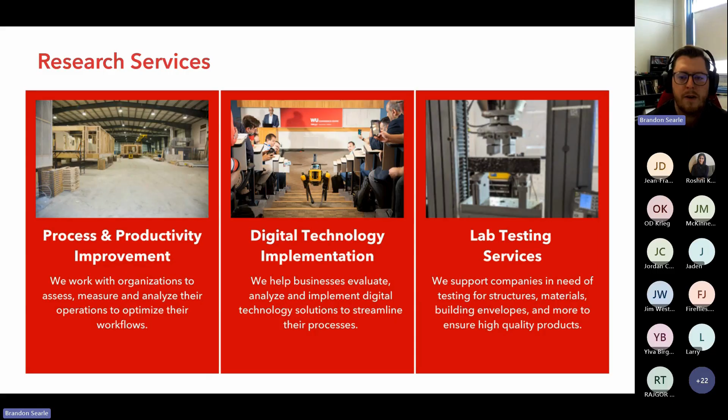Just diving into our research areas. So again, I mentioned process and productivity improvement. It's kind of a high-level list of what happens there, and it's led by Dr. Zhen Lei. Digital tech implementation, again, that's kind of led between Dr. Zhen Lei and Dr. Jeff Rankin. Our structures and building enclosure testing, led by Dr. Alan Lloyd. And our benchmarking and innovation in construction work. And many of you may have seen some of the projects we're doing as it relates to roadmaps for offsite construction in Canada and in different jurisdictions.

So quickly, just about Building Transformations. So they've partnered with us to deliver this webinar series. Building Transformations fosters industry innovation by providing programs which help our members push the industry forward. Their purpose is to advance civilization by driving the building industry to be global leaders in innovation and technology. They have over 2,000 members, nearly 10,000 in their mailing list. And there's, as you can see here, a nice mix of industry, government, academic institutions.

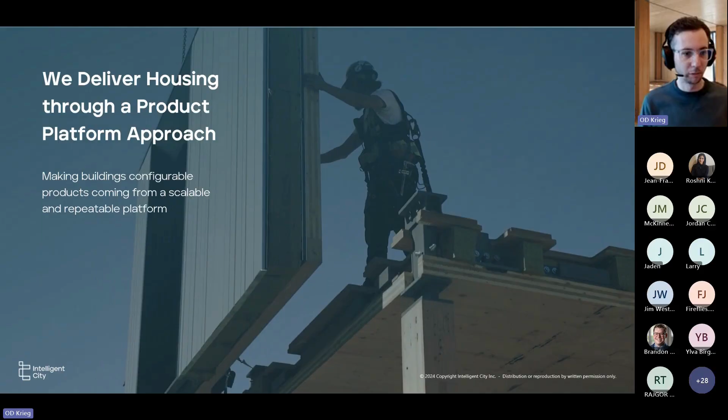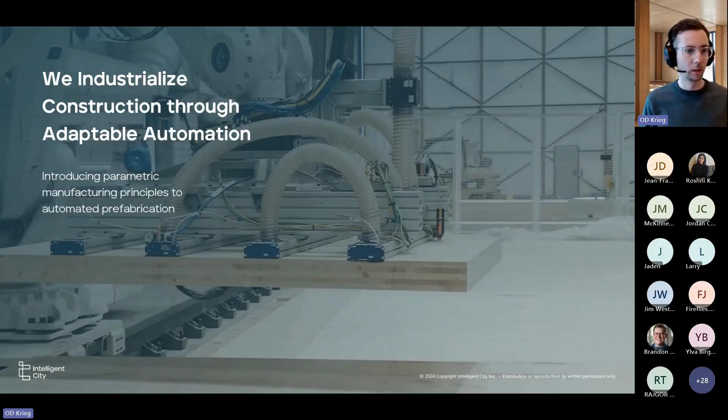The original idea was relatively simple. We want to deliver housing through a product platform approach. We want to develop a configurable kit of parts, a configurable product, if you want, from a scalable and repeatable platform. And we want to industrialize construction along with that, because in order to deliver configurable kits of parts, we need a certain flexibility in manufacturing automation in order to customize building components like that.

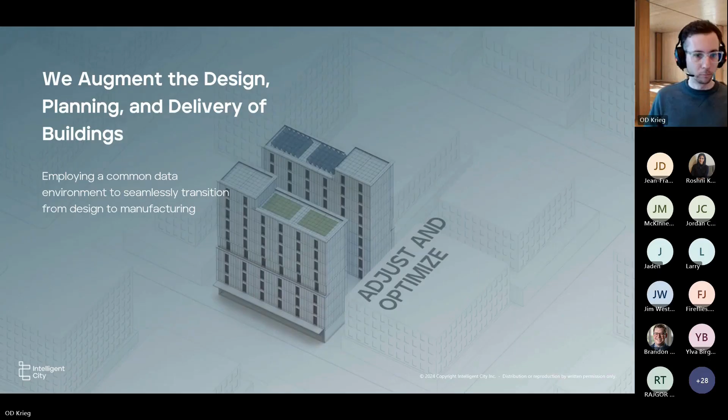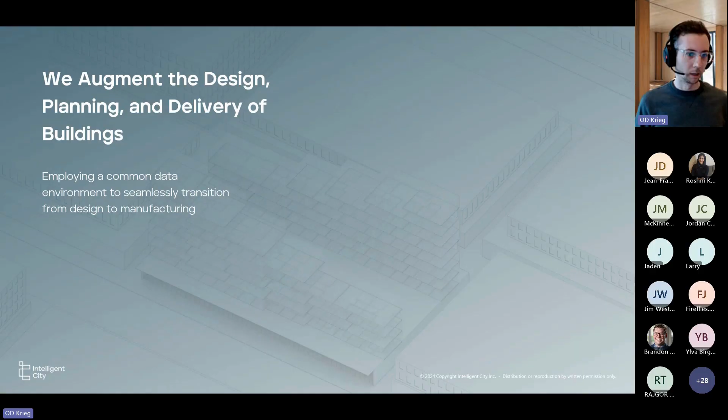And ultimately, with all of that knowledge, it also invites automation and software to augment the design, the planning and delivery of buildings, and to ultimately create a data flow or common data environment, if you want, to seamlessly transition from design to manufacturing. So from 2018 onwards, I joined the company as CTO, and I recently took over as president. As the company matured, I think it's a natural step to build a leadership team.

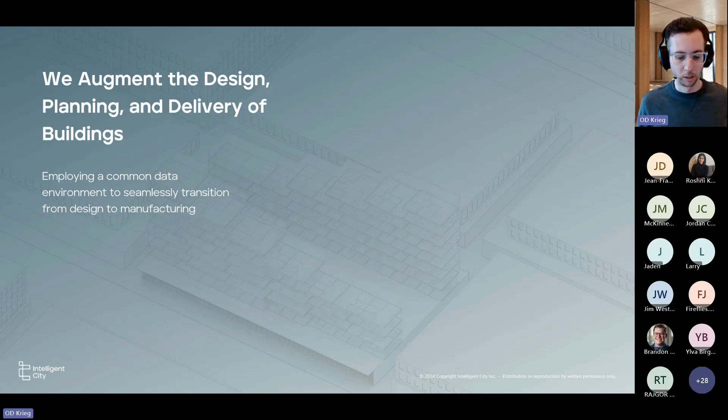And I'm only doing this because we have a really good leadership team from construction or mass timber, project management, business development, where we really combine all of these ideas into a large operation. And while we are only in Vancouver right now, we have projects across Canada, and we are trying to expand into other provinces as well.

We're all here for the same reason. I don't have to repeat that probably. We are facing a whole bunch of challenges. Developers are facing mostly those challenges, and it's up to the developers often to figure out a way to build nevertheless. And while maybe the incentives are different, the problems are the same.

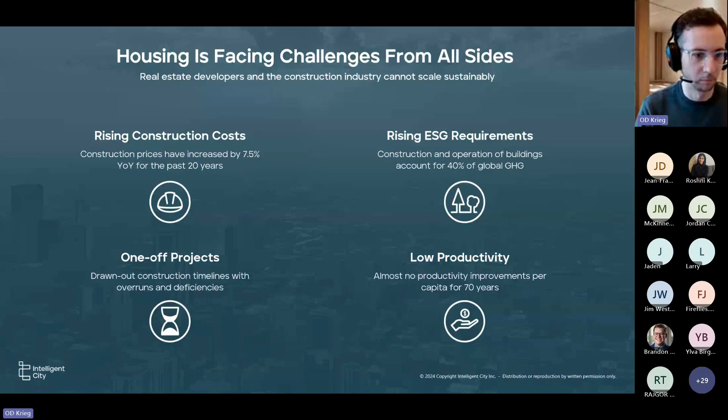And it's kind of fascinating to me as someone coming from Germany, having moved to Canada, having the Canadian citizenship now. It's fascinating to me to have gotten to know a different country and how they approach problems, how they see what they can do with their resources. It's just been an incredible journey the last 7 years for me to see how not too recently mass timber was approved in the building code. I think it was 2014. And to have seen how quickly it has gotten adopted, how much people are really trying to make it work.

We have the resources in our country. And last time I checked, the amount of forest that is approved for harvest, which is a sustainability calculation, right? You're not harvesting more than is regrowing. That amount would allow us to build all residential construction 3 times over every year. So we have the resources. They might not be very accessible, but there are ways to cultivate forests for harvesting in a sustainable manner. We can see it in Europe all over the place.

And there are many ways to innovate in construction to make it more systematized, more organized. But it comes with challenges, and that's what I want to talk about today. I don't want to talk only about Intelligent City. Obviously, I want to present to you what we are doing and how we are approaching it, but I do truly believe that we all have to upskill and find strategies with which we can accelerate the supply of housing or any building that is needed.

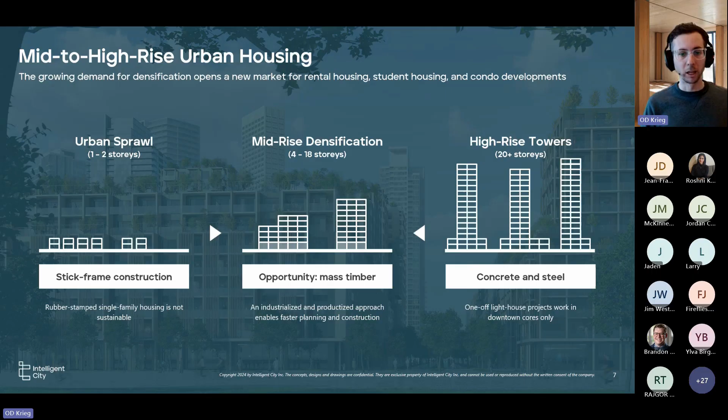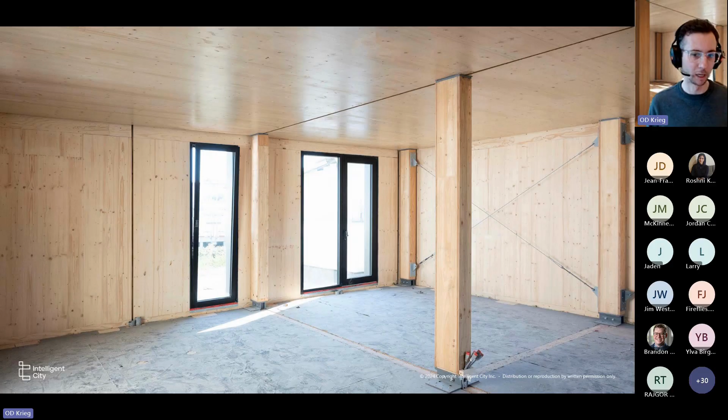So not only is mass timber construction and mass timber prefab construction slightly cheaper than concrete, you also save other trades and materials now, and there are other advantages that come with the material, such as a more biophilic environment, a very beautiful material to look at. It has proven to balance moisture levels and the atmosphere in your apartments. And it's a very good material to work with, of course, especially in prefab. It's easily machinable. It's a very clean material to work with, and it's lightweight enough to move around a factory more easily and to move around on trucks more easily.

At the same time, there's also really an opportunity in Canada to enable the mass timber value chain. Intelligent City has gotten many grants from the forest sector because of the opportunity to value add and to reduce the amount we are exporting lumber and pulp, and to instead use the materials, make them into CLT or other mass timber parts, and ultimately go even further, make them into building components, which are of course much higher value. And there's a lot of opportunity here to export building components as well, right?

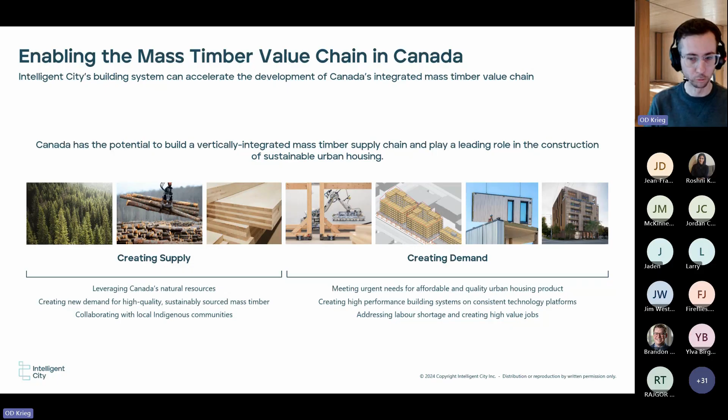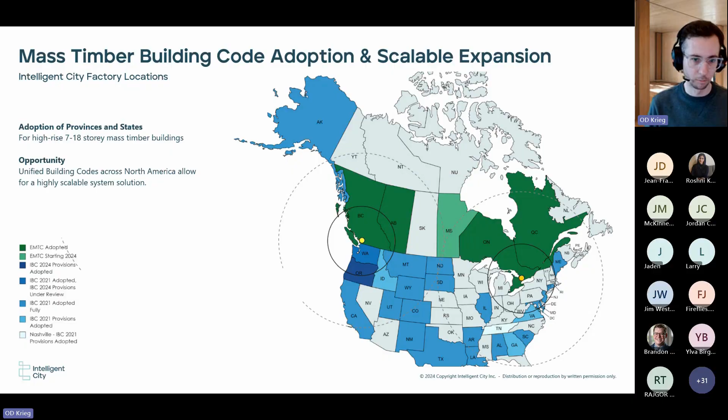Now, I mentioned product platforms before, and I want to talk 5 minutes about that. So maybe that's the little teaching aspect to this presentation, but I think it is truly, truly important because our industry, for some reason, has been pretty detached from many other methodologies that have been used in other industries. And product platforms are a very smart way to try to make as many variations with as few parts as possible. That's literally your KPI. How many product variations can you achieve with how many parts?

Kitchens are a great example. Kitchens have a base element, the cabinet. It's actually an industry-wide platform, not only within a single company, like car companies all have their own platforms usually, but a kitchen is actually industry-wide. It just proved to be so beneficial to stick to a certain dimension that all kitchen suppliers have more or less agreed to using those dimensions.

So you have the base platform, you have specific core elements that are uniquely different from each other, and then you have variants of those. If I use the laser pointer, yeah. Then you have different variants of those core elements. And then you also have complementary elements that are usually not supplied by the same supplier, but they are complementary to what the supplier supplies, and the interfaces between those are standardized.

And so everyone knows I can get any stove that I want from any supplier, and it will fit into my kitchen, right? And now you configure the project, quote unquote, if you will, the finished kitchen, right? And so no kitchen has to be the same. You can reconfigure that, and it'll always work. And in every element that you used here, the manufacturing information is already known, right? The engineering is already known. That is the opportunity that we have.

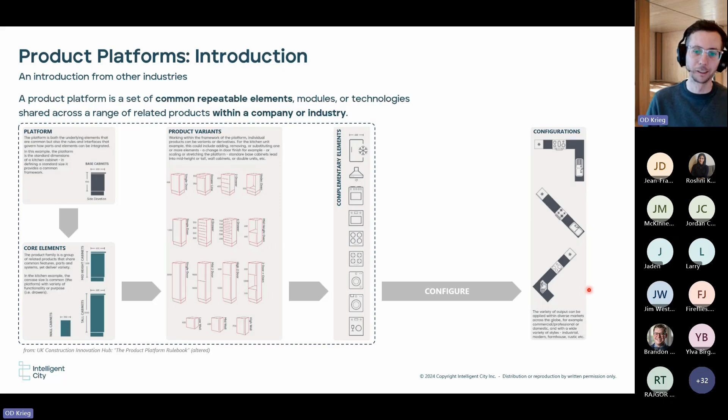Now, of course, kitchens are very simple compared to whole buildings, and we'll get there in a second. But one thing that really, truly changes that we should think about is when you stop thinking about project-based and you start thinking about product-based, pretty much everything changes. A project is a temporary and unique endeavor, as I wrote here. You think from start to finish, whereas a product is a permanent good or service that has life cycles. Your goal is not completion, your goal is consumption.

Your metrics are not completion, cost, and acceptance. Your metrics are sales, revenue, satisfaction. Your requirements are iterative. And your team is continuous. And the scope is continuous as well. You go through iterations, you update the product, you release another version that is better or can serve a larger market, right? Or maybe it splits off into different products that serve unique markets. And so your goal is that you have it all figured out and you can sell multiples of it, right?

And that is a very different approach to how we see projects usually, especially, I think, in the team segment, as you can probably all imagine, from the experience that you have working on different projects with different teams. The amount of information we lose and the communication that we struggle with... if we had to imagine every time they build a new Volkswagen Golf, they have to find completely new teams to do it. You would not get to that continuous improvement that we see in other industries.

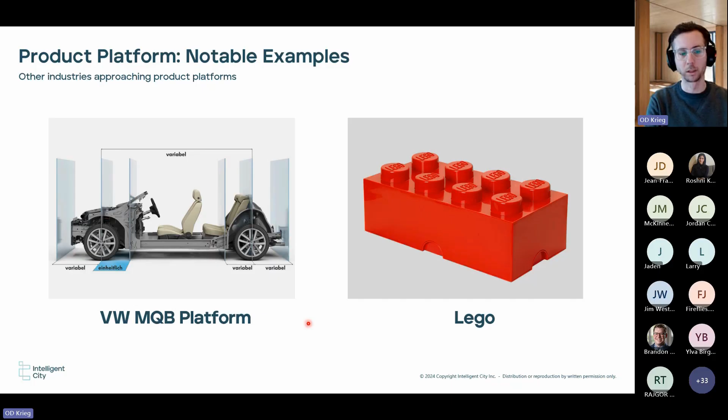Other notable examples, of course, as I mentioned, are cars, and we talk a lot about cars and how we don't build our cars in our driveways and so on. But obviously, we don't do that because cars have wheels and they can drive and they can come out of a factory. Houses and buildings cannot drive, so we do have to assemble them on site. But there are certainly some aspects that we can learn from. Lego is also a good example, but neither of these really show or have a solution to the problem that we are facing in our industry. And that is the unique geometric customization that we need to do.

We don't go to a Volkswagen dealer and say, I would like a Golf, but I would like the Golf to be 2 inches longer because my garage is 2 inches longer and I would like to make use of the garage space, right? It's expensive real estate. I don't want to lose those 2 or 3 inches. I need to fill it up, right? That's how developers think. And we don't have that option.

You don't go to the car configurator and change the car shape. You can choose between different products. And the reason for that is obvious. The car manufacturing process doesn't allow for that flexibility, and we've all accepted that constraint. And instead, many different companies have come up with different products that fill as many of those gaps as possible, right? But they are distinct products and distinct versions. And there are enough out there to fill the sort of needs we have.

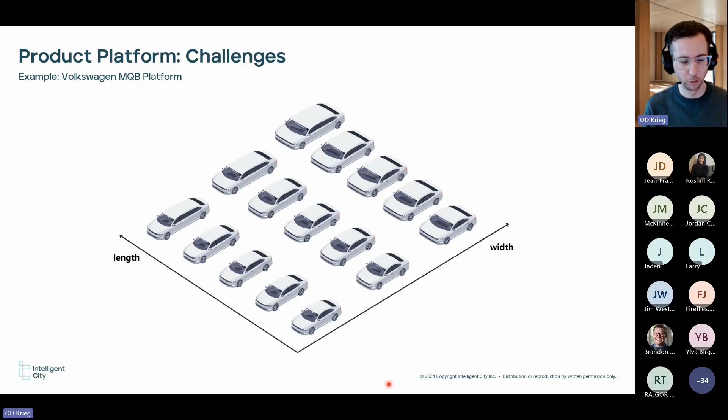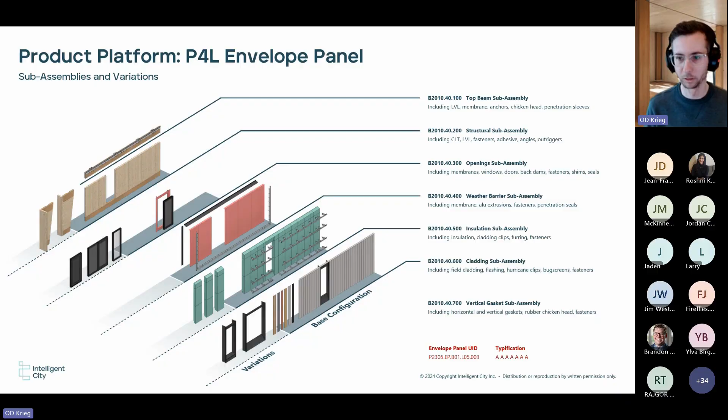There are constraints, of course, and there are more constraints than we have currently with traditional on-site construction. But you still need some sort of flexibility here to adapt to these different building shapes. And that is ultimately sort of what we define as our product platform. It's a very flexible, we want to call it parametric, although that is a bit of a stretch sometimes. A parametric product platform that has core elements.

And for us, the core elements are what we make. We manufacture envelope panels. We manufacture the structure of the building. These are floor cassettes. I'll talk about that a little later. And we also integrate mechanical and electrical services inside the floor cassettes. That's a unique thing. And these are the ones that we manufacture, we control, we understand 100% what they cost and how they function. Part of a product platform is always manufacturing and software and people, processes.

And then we have complementary elements. Those are exactly like before in the kitchen example, elements or components that we don't manufacture, but we want to interface with. And good examples are bathroom pods. We would like to build an ecosystem of suppliers that make bathrooms, that make interior partition walls, that make balconies, and other parts of the building that we can prefabricate and put on site and assemble instead of construct.

And this is a journey. We haven't figured this all out, especially on the complementary element side. We have engaged with bathroom pod suppliers. It has huge implications on our apartment layouts. And as you can imagine, there's all sorts of requirements that come from developers. How does the building need to look to make sense for a specific market? And so there's a lot of back and forth still trying to figure out what exactly it is. Like, how can we standardize it a little bit more?

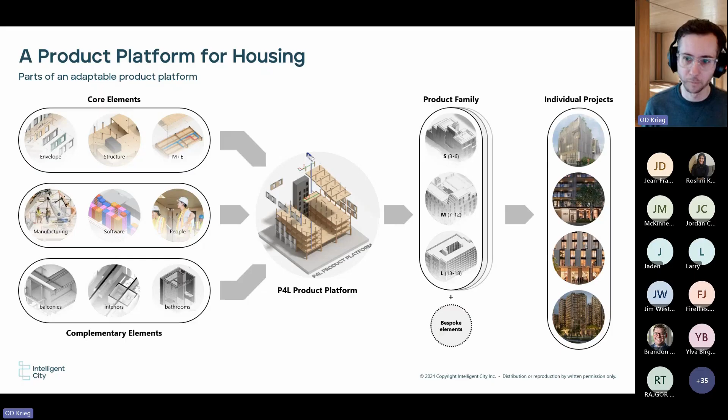No building is the same. So even if we have everything somehow figured out and systematized, you will always have a certain amount of localization that ultimately gets you your individual projects. So from there, to get to all of these different buildings, that is really the secret that I think our industry needs to figure out.

What is the smallest set of common elements that you can develop in such a way that you can serve such a big market segment? In our case, mid to high-rise urban housing. Whoever figures that out, I'm 100% sure about that, will build a very, very big company. That is really the secret.

And the problems and the challenges we are facing to get to that point as an industry is simply related to an acceptance, an understanding of that approach, and of course, also permitting. Different jurisdictions have different requirements, right? And I think there are many initiatives out there right now trying to figure out if we can find a common set of building typologies and designs that get pre-approved. It's a huge step. If we get to that point, now suppliers can start developing their building systems around those. And that will ultimately allow us to boost this idea of manufactured building components.

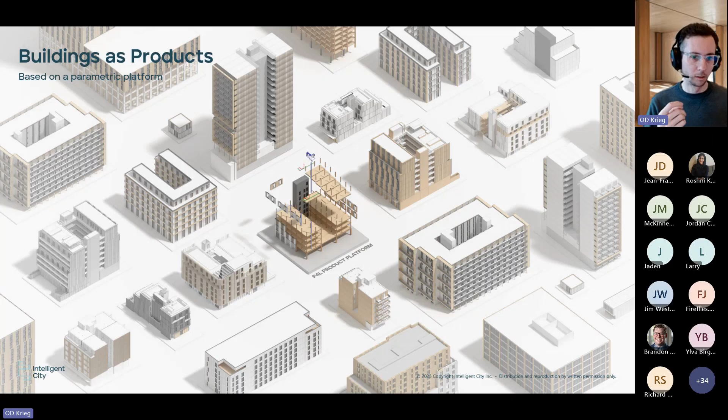I do want to mention it quickly. I'm pretty sure there will be questions about this. What about design freedom? What about the uniqueness of the buildings that you have? Absolutely. We are founded by architects. Many of us have an architectural background. The whole idea is here that we figure out these systems so that they allow for that design freedom, right? We don't have a single building. We don't have a single type of cladding, a single type of balcony system. We want to enable that flexibility in many different ways.

But if you ask us what is the product ultimately, well, the product is the family of products; we like to divide it into those 3 different heights. Low rise, 3 to 6 or 5 to 6 stories. Ideally, I think we're really competitive at 5 to 6 stories, where we compete against stick frame. Here, you might have sometimes a bit of a 5 or 10% cost premium, but you also get a higher quality building.

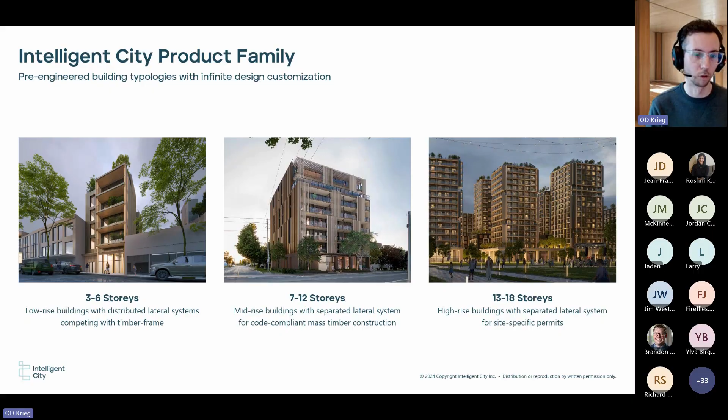When it goes to 7 to 12 stories, our experience so far has been that we are cheaper than concrete. And then when you go to 13 to 18, you might be on par with concrete depending on the specific building design and the structure of the building. The lateral reinforcement just becomes a little bit more complicated. But ultimately, we are configuring a product instead of designing a project.

And so ideally, I have to say, this is a bit fast forward a few more years. We haven't figured all of these aspects out, but ideally you go through massing, yield, performance, structure, facade customization, accessories, and interiors. And there are a certain number of options that you can pick from, and then you have configured your building, and we're good to go. Fundamentally different from how things are going today. And I will say this requires a lot of things to fall in place.

Intelligent City is not that vertically integrated either. We see ourselves right now as a collaborator with builders, with architects, with engineers, because we are neither. We are not an architect, we are not an engineer, we are not a builder. We manufacture building components, and we like to look at the whole building because it's really important to look at the whole building when you design with prefabricated systems. But we need collaboration. We need the architect, we need the developer, we need the builder to work on this with us for these buildings to be successful.

So our solution to this is threefold, as I mentioned in the very beginning: customizable building systems, automation in manufacturing, or simply manufacturing. I would argue just the fact that we adopt manufacturing principles, which means you have an assembly line, you have a certain level of standardization in your processes. You don't retool every time you build a new building, but the assembly line is able to adapt to the different design customizations within that logic.

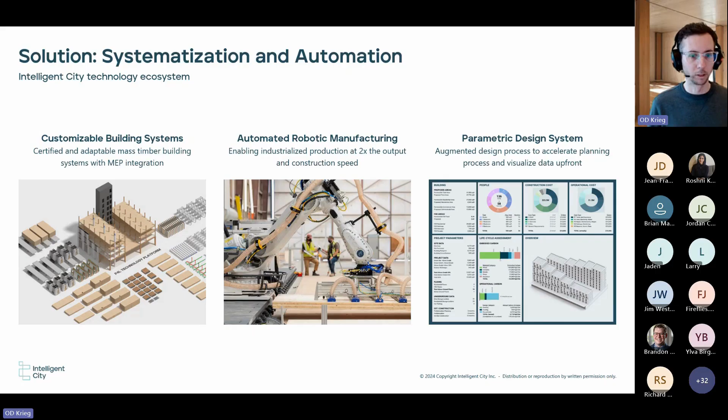And then ultimately, once you have that, you can also automate the design process, or some of the design process, especially the back end of manufacturing data generation. So you start building a software environment where you design a building and you get to manufacturing data really quickly. So this is how it looks.

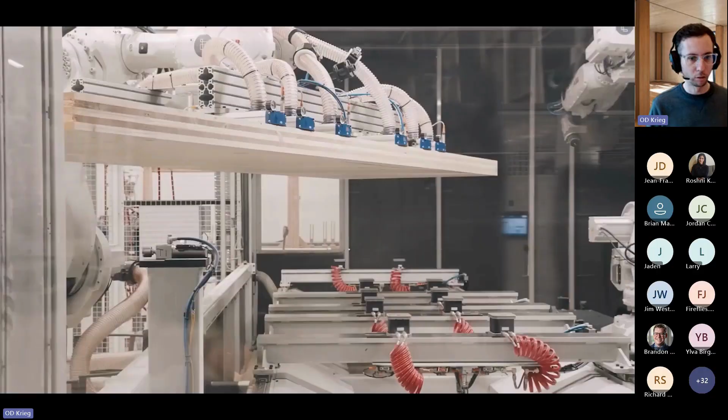Ideally, this is what the building design can look like. This is pretty far-fetched, and oftentimes it doesn't work, so I'll say that, but this works. The production of building parts, the building parts generate machine code, and then we can execute in our factory. So last year, we started production on our first project, delivered it at the end of last year. We're now on our second project at the moment.

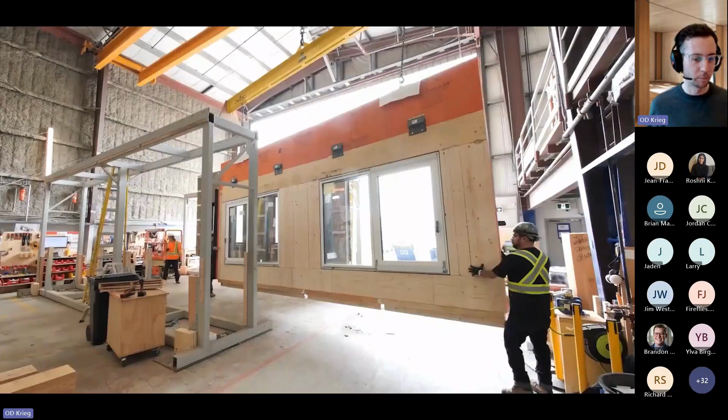But just to show you some impressions from our factory, some robotics here, we're machining the parts ourselves, put them together with some robots, and then a lot of people. That's really an important part here. We're not automating 100% of the process. There's a lot of other things that are happening manually.

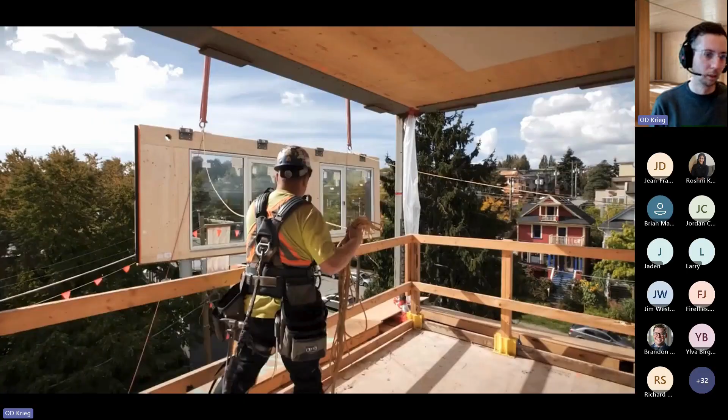And then this was a 9-story building in East Van for the BC Indigenous Housing Society. So this is a pretty big deal. This is a very important project to the Indigenous Housing Society, bit of a lighthouse project. You can see the cladding here. It is hinting at a basket weave pattern. It was extremely complicated. We would not like to do that again.

Doesn't matter because the building was designed and permitted a few years ago, and it's completely encapsulated, unfortunately. So you will not see any of the timber anymore. It's quite unfortunate, but this is sometimes how these design processes go, especially when they go for a long time. But we came in late, and we were able to slightly catch up with our envelope production, ramp that up into our factory, learn a million things, as you can imagine. When these things fly through the air and get assembled, there's a lot of things we learned.

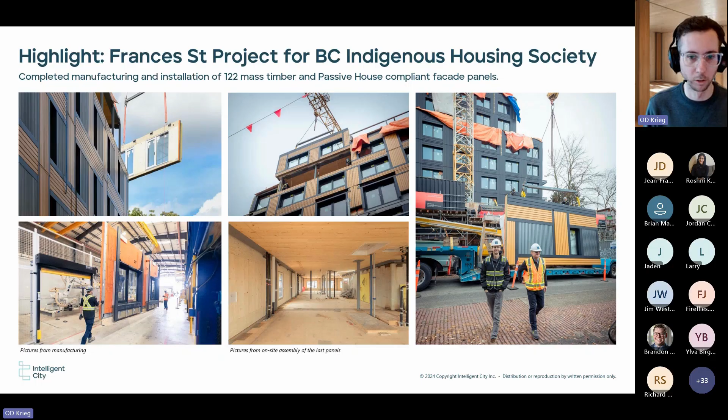What we are working on right now is a project in Toronto. It's also a 9-story building. It's also around 50 or 60 units, a rental building with Windmill and Leader Lane developments. This is fully our product, how we would like it, applied, basically. The design of the building is actually a little bit special, I would argue. It has very small units, 350 square foot studio apartments.

But the way we have wrapped the structure around a concrete core and then the envelope around that is relatively efficient. We have about 100 of these floor cassettes that you can see here in the picture and 100 envelope panels. And we're starting assembly on site in May. And if things go well, we are planning this to go up in 80 days. 9 stories, structure and envelope. Building is enclosed, starting in May, finishing in July, and then they can finish the interiors.

Which is also really interesting for climates like Toronto and Ottawa, and I'm pretty sure most of the East Coast, Calgary too, where you have a cutoff date with concrete, right? And you need the structure to be done. Ideally, you want to have it enclosed before the winter comes. And so having the opportunity to set up the structure and the envelope really quickly and then focusing on the interiors afterwards allows you to time the construction really well in these climates and also just work a lot faster.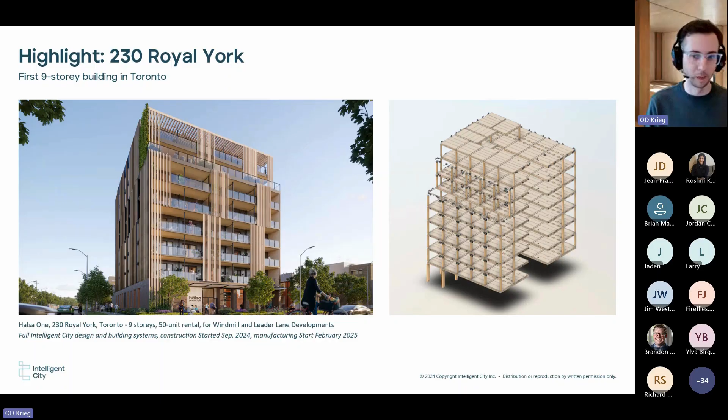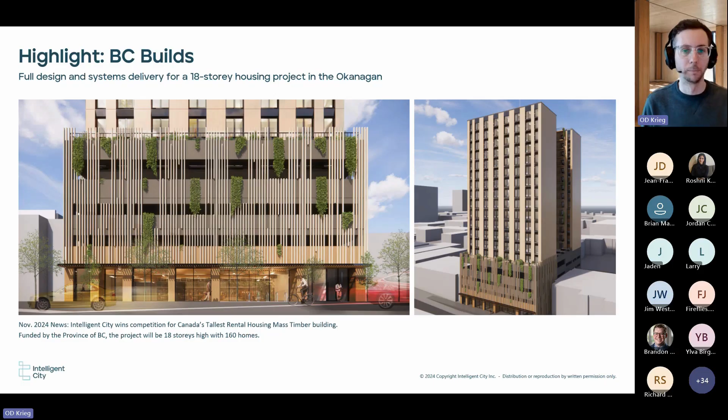Other projects are coming up. We won a competition for an 18-story housing project in the Okanagan with BC Builds. That will likely start construction end of the year or early next year. That's a really amazing opportunity, of course. It's a huge building, and it just is exactly what BC Builds wants. They want housing, they want it fast, they want it efficient. And this is where systems like those really shine.

So from a customer perspective, it's actually quite similar to anything else because we are just a supplier ultimately. So one thing we like to do is go through a feasibility phase where we simply evaluate if the building works. If there is already a building design, early phase, development permit or something like that, we can just analyze that really quickly and see if the grids work and the facade works, if there's anything we need to change, and sort of give it a score and say, there's a few things we need to maybe adapt, but then we could employ our systems.

If there is no building, a developer can come to us and ask basically to see what the yield could be, how many apartments can we fit, what's the massing like. So sort of what you see on the left. And then we go through the planning phases, which are just the typical planning phases, except they can be accelerated if we use some of our standard apartments. They're all pre-planned. We can employ them really quickly. Otherwise, we just go through SD, DD, and CD phases with the architect, and we basically do a design assist process where we guide the design of the building so that our systems can be applied.

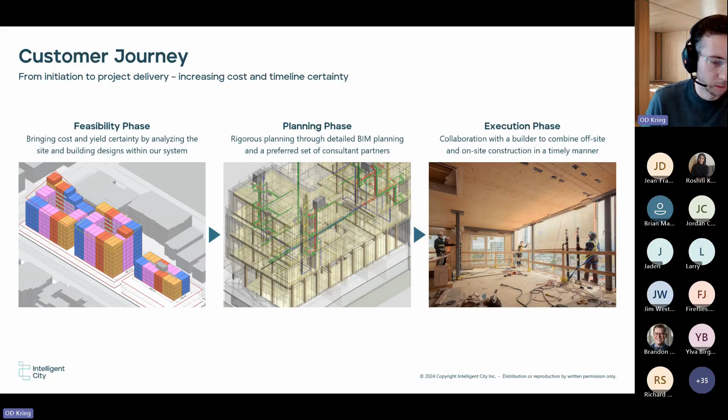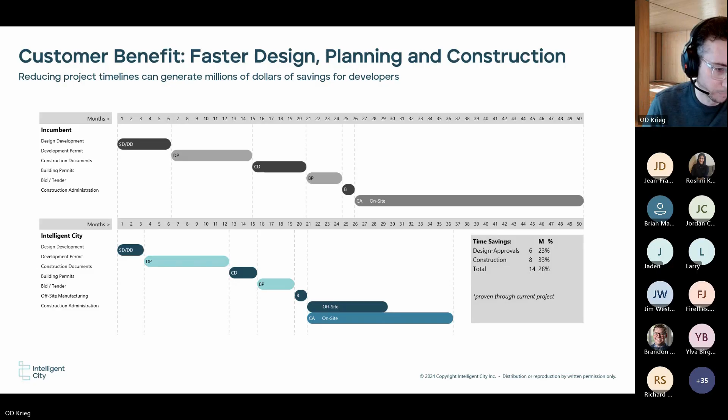In high-rise construction, it depends a little bit on the market if we do a concrete core or a steel core. Honestly, a steel core is better because steel cores can be assembled with the mass timber. Concrete has to be finished before the mass timber comes in. Because of the formwork going up and people working on the top, we have to wait. But nevertheless, that's what we're doing right now as well. A concrete core goes up. Once that is done, we come in, we put the floor cassettes down, the columns, and then 2 levels behind, we start putting in the envelope panels.

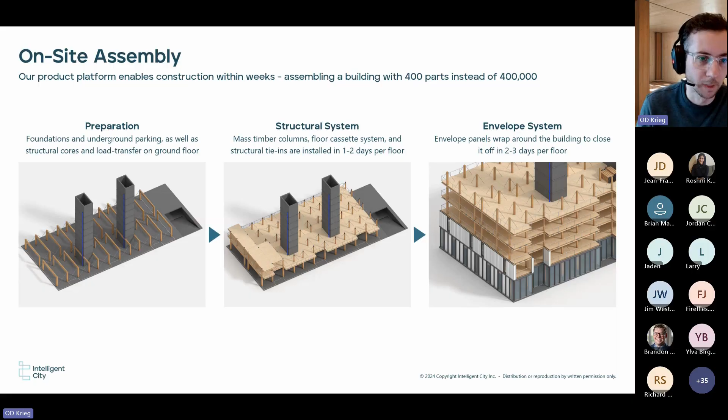And so in a relatively large building like this one, you have 1 or 2 days per floor for the structure, and you have 2 or 3 days per floor for the envelope. And you can work in parallel, and so that's what allows you to really accelerate the assembly time of the building. And one other aspect, talking about mass timber, passive house, operations, you simply reduce your GHG emissions completely, especially compared to what code minimum was a few years ago. This delta will probably balance itself out a little bit over time as the building code is also increasing energy efficiency. But ultimately, it is the embodied carbon and the operational carbon.

And when we look at urban densification, it's also the behavioral emissions that people have, if they have their own car versus they use car sharing and urban infrastructure instead. And so if you don't have parking in these buildings, our buildings can be carbon neutral or carbon negative over their entire life cycle. And so just seeing that this is actually possible with today's technology is incredibly encouraging. There's no magic involved to make buildings carbon neutral. We just have to be very careful with the embodied carbon, and we have to have very energy efficient buildings and ideally use renewable energies. And we get to carbon neutral cities.

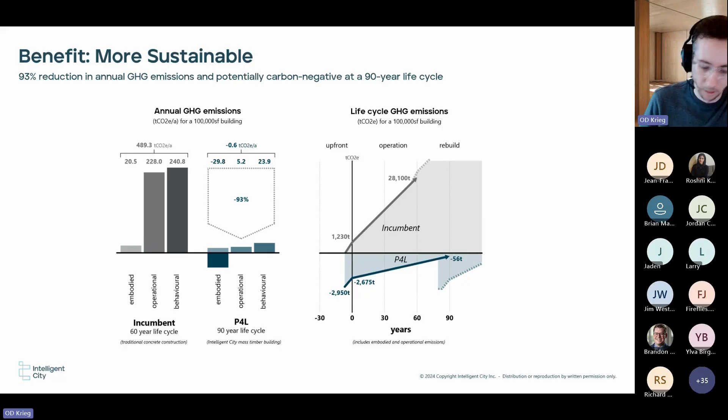And for developers, there are a few aspects to this. The time savings is one, and the operational cost is another one. There are many other smaller aspects that I'm ignoring right now, but ultimately you can get to a cost reduction of your investment needed of up to 20%. And you get a building that is a higher value, potentially higher rents or sales, but also lower cap rates because of the building life cycle, the ESG compliance, and the carbon neutral aspect. There are obviously other potential benefits, such as carbon credits, that we're not including here right now.

So a few more slides about the development process. So just want to show you a few more details about how it really looked like when we developed these systems. So I mentioned the floor cassettes earlier. We are looking at the structure of the building a little bit different.

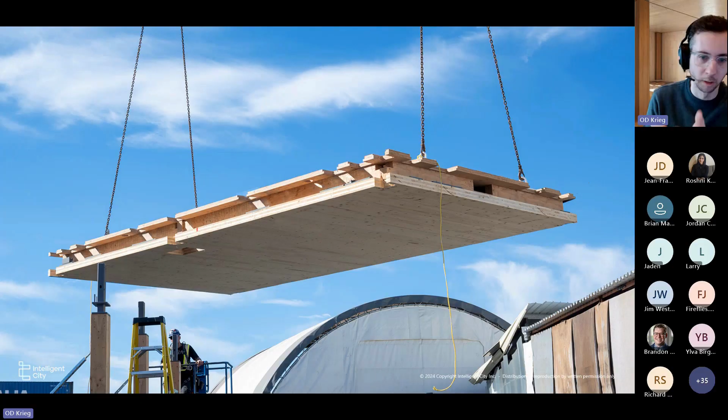Because of manufacturing requirements and our ambition to implement more services inside a flat packed prefabricated component, we ended up developing our floor cassettes so that it is a double layered system and it can have services inside. So the top and the bottom of this floor cassette here is part of the structure. It's a sandwich panel basically, and it's made of smaller components. You can barely see it here. And inside of it, we can put mechanical and electrical services. But that also has implications on the grid. I'll show that picture in a second.

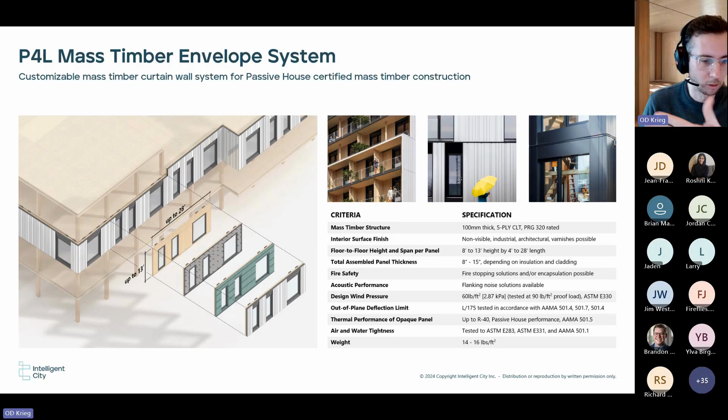And then the envelope panel is a curtain wall system that hangs from the building edge. So it is similar to most curtain wall systems, except that it has a mass timber structural layer that is also at the same time your inside wall, right? Your inside face doesn't have to be encapsulated with drywall and so on. It can just be the timber face. And then the outside is the same as any other curtain wall system that you have, membrane, insulation, cladding system. Different types of claddings are, of course, possible.

What you see here is 8 inches of insulation. It's very thick. It's a passive house design. Doors and windows are included. Cladding is included, all finished. It comes inside. The only thing you have to do is stitch the cladding. You can see it here. There's one piece of cladding missing between the panels. It gets slid on from the top. You don't need any scaffolding, and you close up your envelope already simply with these gasket systems that we have developed here on the sides.

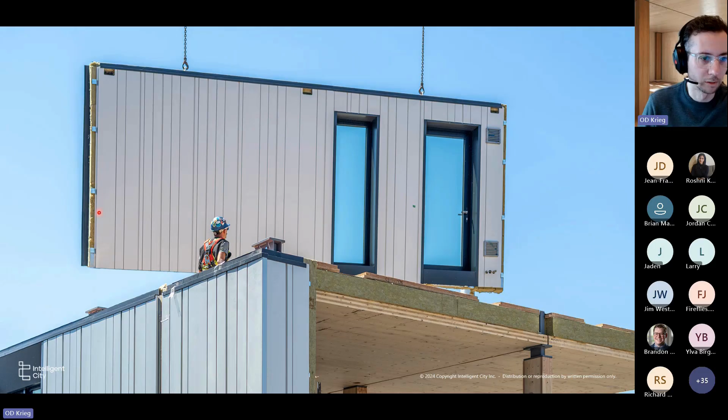For the structure, what I mentioned earlier, this is really sort of the important aspect, is that our floor cassettes are not just randomly laid across the building, but they are actually laid out in the way that the apartments are laid out, because they need to overlap as much as possible with an apartment logic, so that the services that we run inside these floor cassettes are actually very controlled and as much inside a single floor cassette as possible.

So a single floor cassette usually is a studio or 1 bedroom, 2 floor cassettes can be a 2 bedroom, 3 floor cassettes can be a 3 bedroom, and so on. And there's different variations of this. We are still learning exactly what our apartment library, quote unquote, needs to be. But it is very clear that in our system, as well as in all mass timber, I have to say, looking at the grids is just very important.

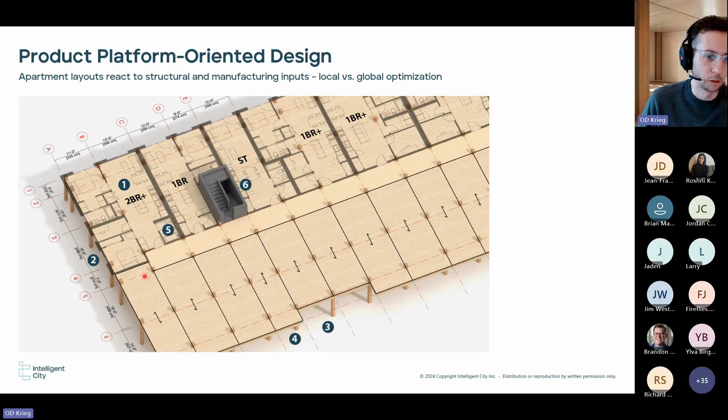You just have to make sure that your columns and your grid are very rigorously placed and they overlap very nicely with your apartment layout. Otherwise, you will run into issues later on. It's not as flexible as concrete or stick frame. You have to look a little bit more at the structure of the building together with the layout. So you're already kind of forced to integrate a little bit more.

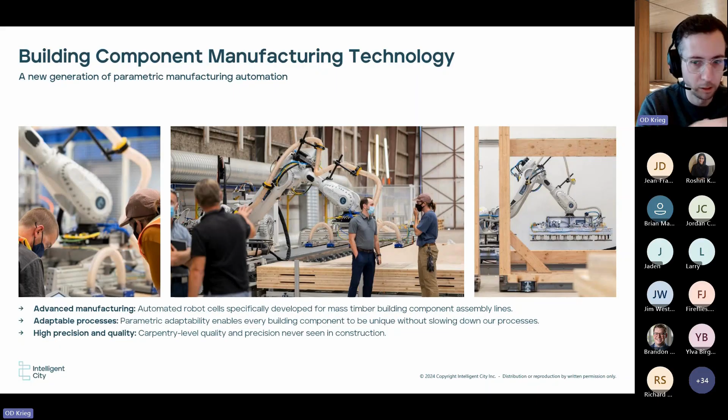Then, as I mentioned, with manufacturing, we really looked at what are the parts that require this sort of level of customization that is really hard to do manually, and also what are heavy things that we move around, where automation is really helpful, loading, unloading, moving materials. We glue, we nail. There's a lot of things that our robots are doing, but ultimately, our factory is still quite small and still quite manual.

So you can see here in the center is our milling center. That's where we are sort of processing stock CLT and other timber materials. And then in the very back here, you can barely see it, is our floor cassette production. That's about 80% automated. We make 1 or 2 floor cassettes a day.

And then this area in the front here is our envelope production. And you can see here that these envelope panels, they hang from a steel frame. That's all manual work, insulation, cladding, it's all manually done. There are ways to automate it, and we're very excited about them, but they require space and money.

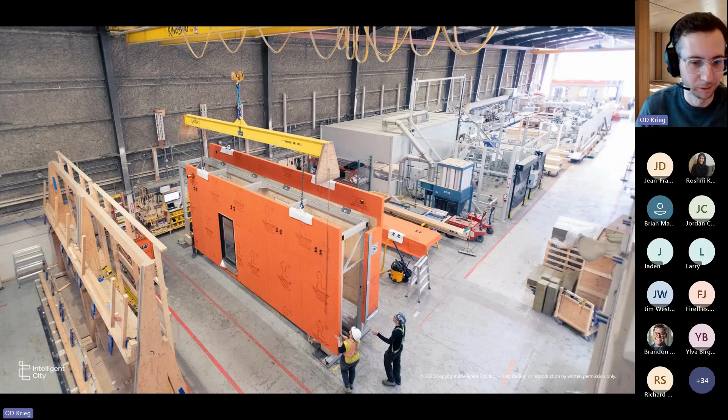And so this is more like a long-term, gradual transition. We'll keep the same amount of people and we'll add more robots to them and increase output capacity, sort of like that.

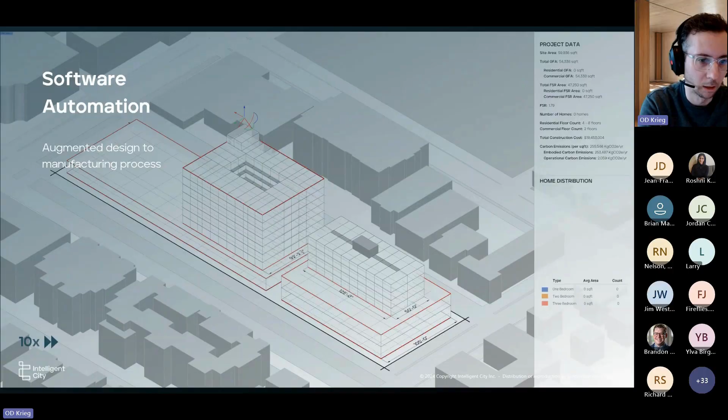And then my last point is about software and data flow. I think it's really important that Canada upskills in terms of BIM and standardizes the way we engage with building designs. We see it sort of in 3 different steps. That's how we divided up our software workflow generally and our workflow internally.

You have the design intent, which you can see here normally looks like that. There are boxes or surfaces and curves that indicate what the building is supposed to look like. But in the background, what this does is it generates our BIM model, it generates our components, and what I mean with that is the actual building parts, right? A piece of CLT, a screw, an aluminum extrusion, and that is modeled like it is being built.

So it's not a continuous profile. If it's 10-foot segments, it's 10-foot segments, and things like that just have to be taken care of so that we can use that then for manufacturing data. And so that transition is really important that we have, like in this upcoming project. We have the model of our building components, structure components, and envelope components.

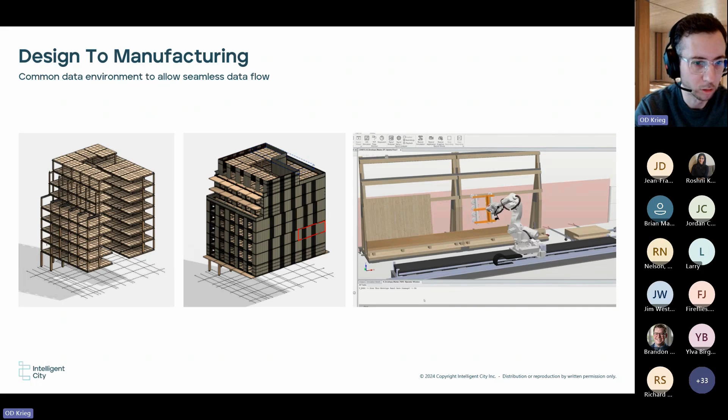You take one of the envelope panels, it generates all the parts, the shop drawings, the manufacturing information, pretty much automatically. And that's really important, it happens all in the back end, no one can see that. But for us, that was the most important part to start.

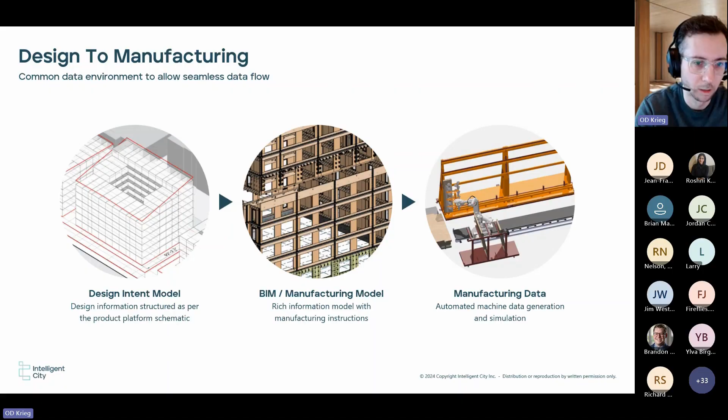The sort of front end here on the left side is something that is beneficial when you iterate through building designs, but oftentimes it's pretty clear, especially in urban environments, what the building needs to look like. There's usually just one singular solution anyway. So it's not so much about going through 1,000 different building iterations. It's much more about automating what comes once you have your design model frozen.

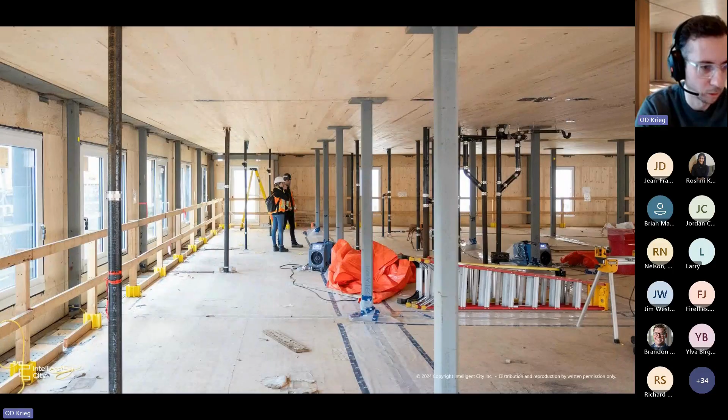So last year was a very exciting year for us to build the first building, to see these panels come together in real life on the 6th floor, 8th floor of a building while it's raining, to see how everything works, to see the team work together. We are about 50 people now. Half of that is manufacturing staff, the other half is management, engineering, and so on.

And now we are just looking to expand. We are seeing a lot of opportunity on the East Coast or just Eastern Canada in general. Everywhere, literally every city has the potential to densify the urban environment, to build 6-story buildings, 8-story buildings for housing. We are seeing that in Calgary and Edmonton.

And we just want to find partners that can work with us on these buildings, that can help us make these buildings happen quickly, that really need housing, that really need to build quickly, and want to showcase that mass timber and industrialized manufacturing really works. We can see it every day. I'm very convinced that it works. I'm very convinced that if we don't do it, someone else will do it.

And I think there will be many companies like us because there's enough housing out there that needs to be built that we need 10 Intelligent Cities and not just one. So I'm not concerned about competition. I'm concerned about everyone working together to find the right solutions.

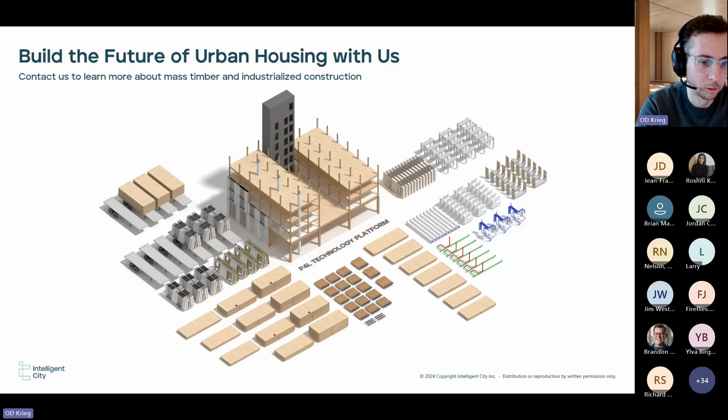We are happy to learn. We are happy to adapt because we are not more knowledgeable than anyone else. There are many different solutions for the problems we have, and we want to find the right one and use that to build a lot of housing. That's really our mission. So thank you so much.